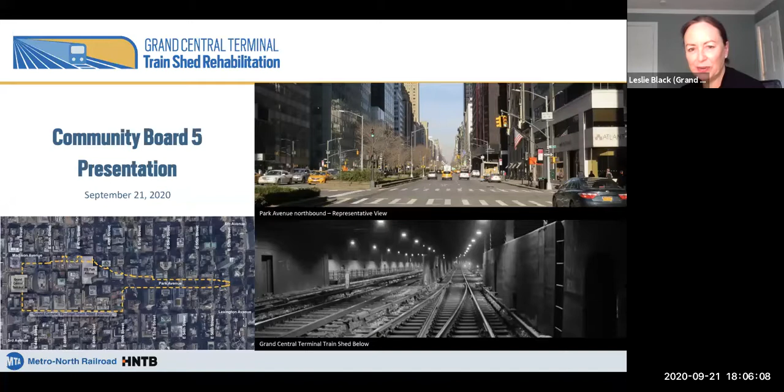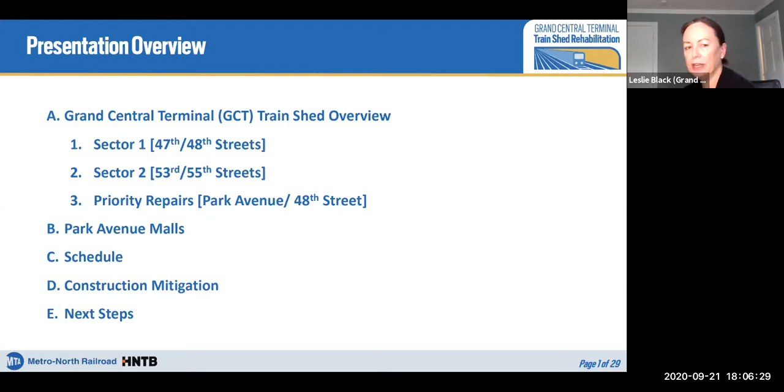Thank you. This is just a presentation overview. We will be covering the sectors that are currently underway, as well as priority repairs. We'll discuss Park Avenue malls, the overarching program schedule, construction mitigation, and next steps.

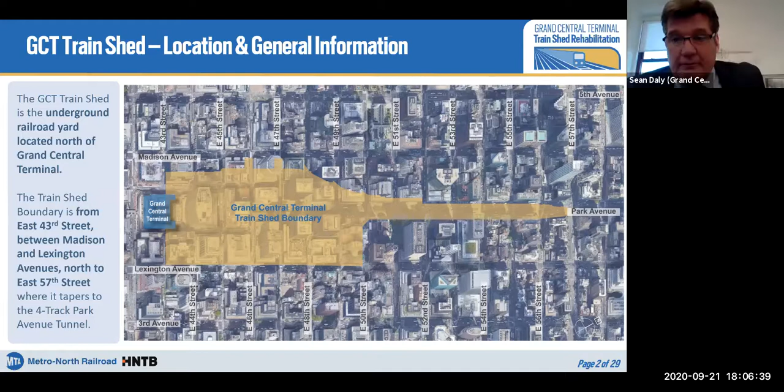I'm going to take you through the first couple of slides here to give you a sense of place of where we are, and then I'm going to hand it over to Sean to go into more detail on the project specifics.

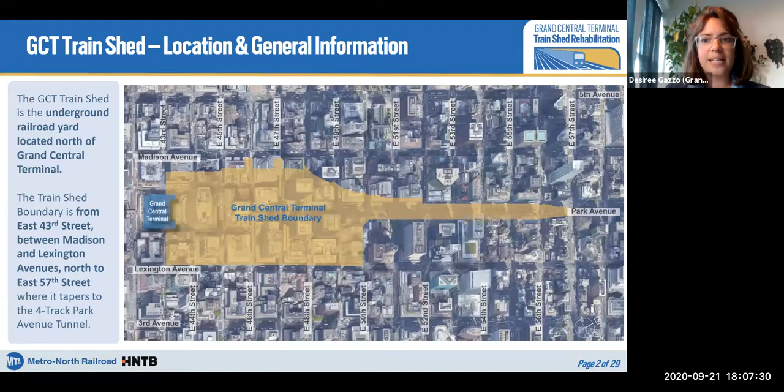As you can see here, the Grand Central Terminal train shed boundary is in yellow. The southernmost limits are Grand Central Terminal at 43rd Street. To the west, Madison Avenue; to the east, Lexington Avenue, and then it tapers down along Park Avenue to East 57th Street.

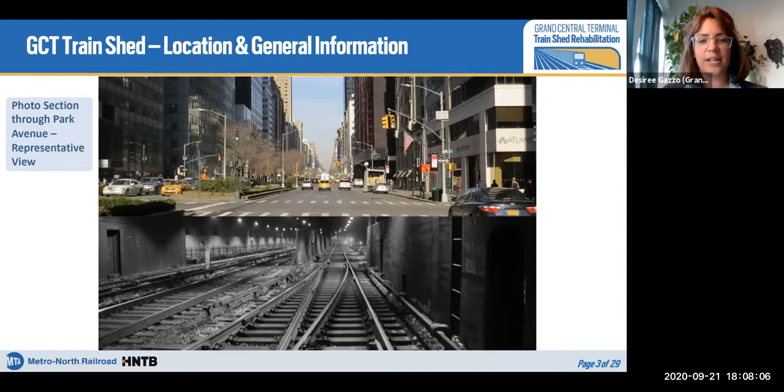Here's a section through Park Avenue. The train shed, which we just showed the yellow outline for, is the image below — if you're a commuter, you should be very used to this image. If you're not, then you know the picture above is more of what you're used to seeing: the streets, the roadways, the Park Avenue Mall, and the hustle and bustle of New York. Underground, there's this whole network of trains and tracks in the Metro North train shed.

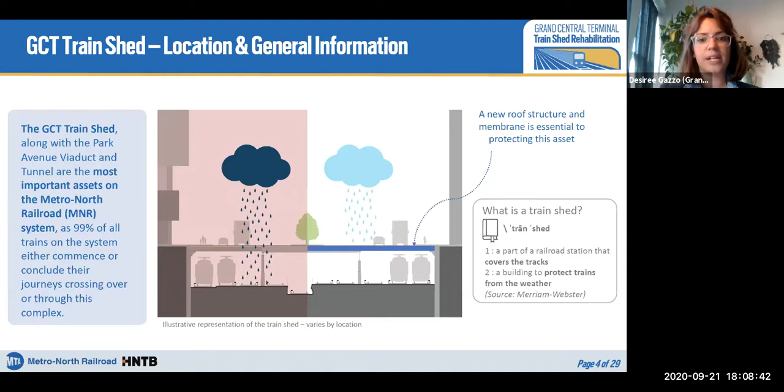Here's an illustration of where we are today, with the existing conditions on the left. Right now the roof structure and membrane are not in the best shape, allowing stormwater and other water to get down into the train shed below. The train shed is typically a building — in this case, a roof structure that protects the tracks and the trains. This train shed is one of Metro North's most important assets.

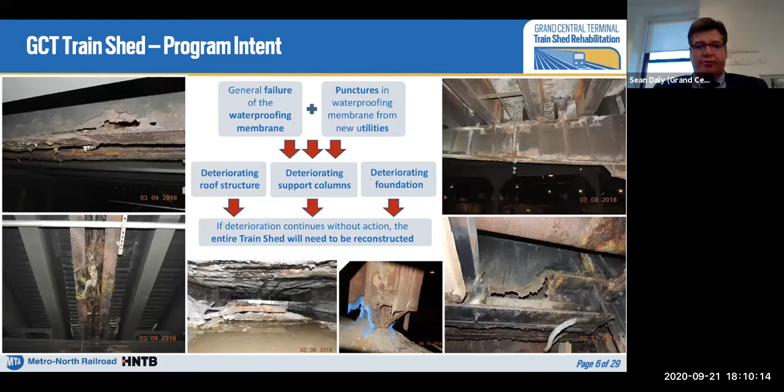As you can see here, our program intent addresses a general failure of the waterproofing membrane. We have not had any opportunity to replace a waterproofing membrane for over 100 years. You can see by some of these pictures just how severe some of the corrosion is. It's not only the failure of the waterproofing, but also punctures over time from bringing in new utilities, creating holes that, combined with water infiltration, have led to where we are now.

Again, just more up close, you can see how close the deterioration is to street level right here, and some more illustration of the severity of the corrosion.

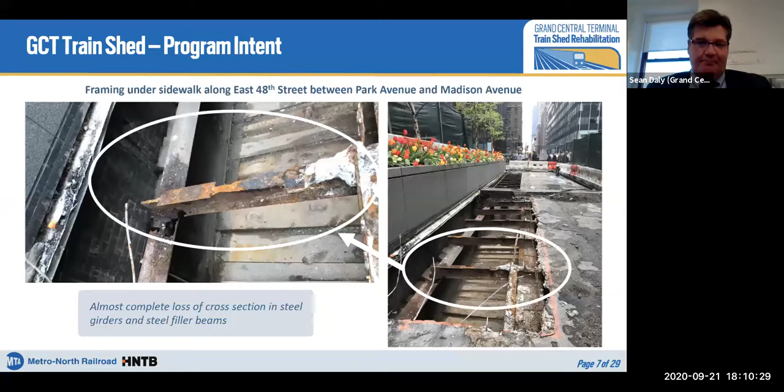Now you can see here from 1984 through 2012, there had been a total of 5 separate priority repair programs. The intent of the priority repair program is to identify the most critical areas in need of repair. Over the course of many years, we have implemented these programs. However, you can see clearly from this picture that we can no longer keep up with the rate of deterioration, and something more aggressive needed to be undertaken.

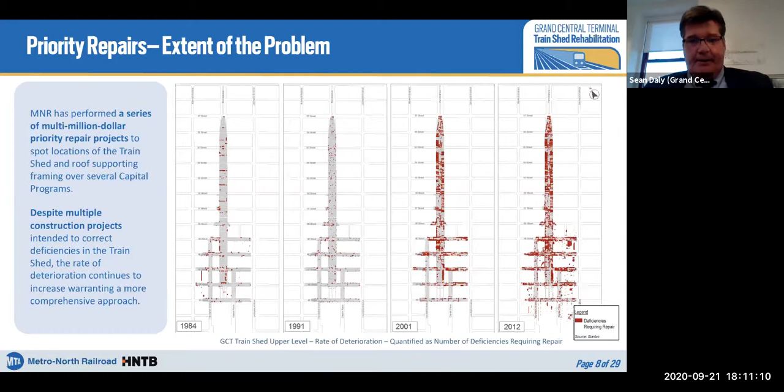Here you can see what the bigger picture proposal is. On this illustration, you can see where we have identified 2 sectors. To date, we have identified a total of 11 sectors that make up the entire train shed. We're going to be talking about the first 2 sectors this evening.

Also, you can see priority repair number 6 identified there. That is one of many areas that we are currently fixing under our current priority repair program. That's just the largest one, and you can actually see it now if you walk out on the street at 48th and Park Avenue, you can see our progress.

I want to talk a little bit about Sector 1 and the differences between 1 and 2. You can clearly see that Sector 1 only goes halfway across the train shed at this location, from the west side of Park Avenue and the west portion of 48th and 47th Street. The intent is to do this work in conjunction with the 270 Park Avenue redevelopment, which is currently underway.

Sector 2, which is from 53rd through 55th Street, the major difference here being that the train shed spans across the entire width of Park Avenue. So any betterments or upgrades that we are proposing at the Sector 2 location, we will be able to complete in one construction phase. Sector 1 we will be able to do half, basically from Madison over to the center line of Park Avenue, and then revisit the sector to the east when we are in that capital program.

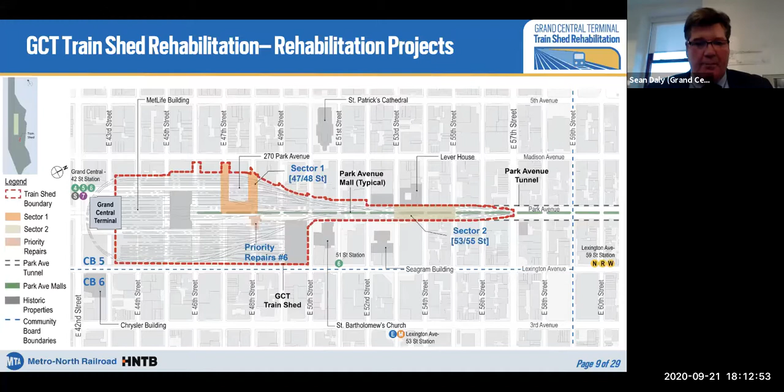Here's a bigger view. You can see the viaduct which surrounds the 270 Park Avenue redevelopment.

Again, the intent is to work with the schedule for the 270 Park Avenue redevelopment and try to maximize efficiency with the work that's going to be done underground.

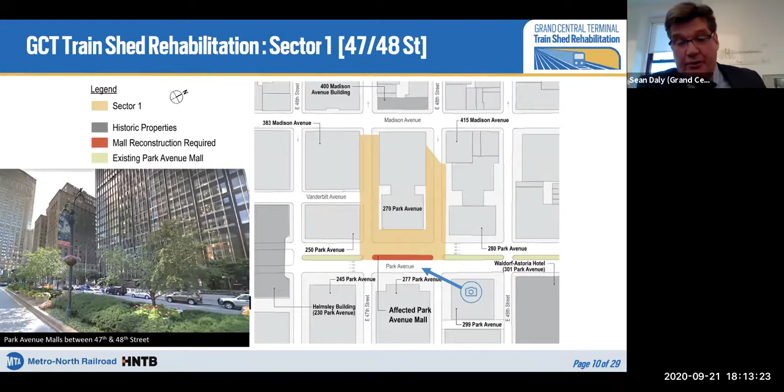Here you can see a 3D rendering to give the neighborhood a sense of just how close we are to the work. A significant difference here compared to, say, the 2nd Avenue subway: we do not have to do any major excavation, we do not have to do any building underpinning. Basically, we are replacing a bridge. So our intent is to get as much work done below grade before we impact the above-grade everyday life of the people affected by this work.

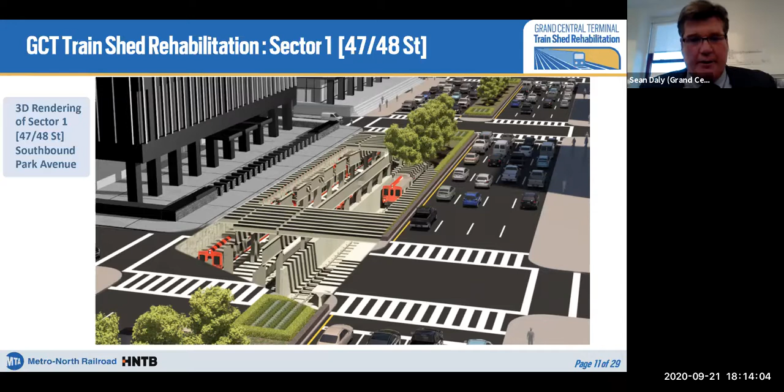Here you can see a typical section looking north at the Sector 1 location. You can see that we have 2 layers, the upper level and the lower level of the train shed, followed by the street above. You can clearly see that the viaduct roof, which you saw in the earlier photos, is in severe condition, and it is supporting not only the people but the cars, and it obviously needs to be maintained to allow for train operations to continue unimpeded.

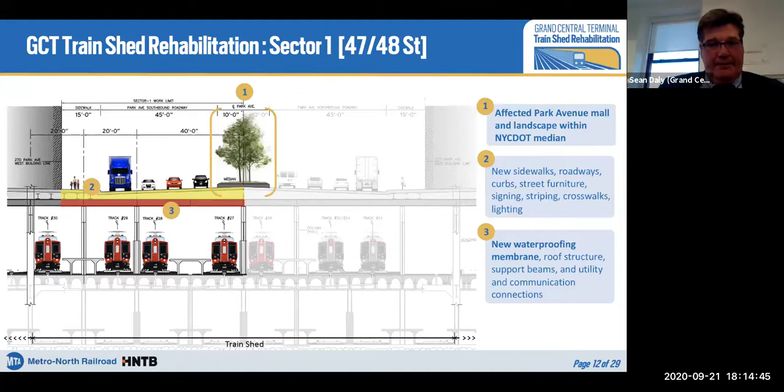Here's a quick look at Sector 2, which we discussed before, from 53rd through 55th Street. Again, just another look showing that all of the work being proposed here at Sector 2 will traverse the entire width of the train shed.

So whatever we propose, we'll be able to complete from one side to the other in that same construction phase.

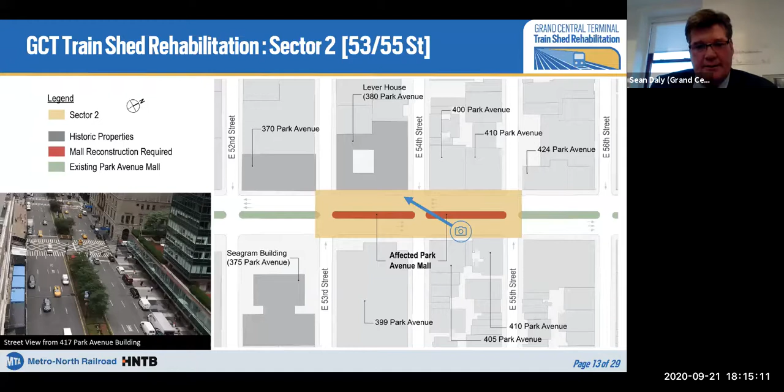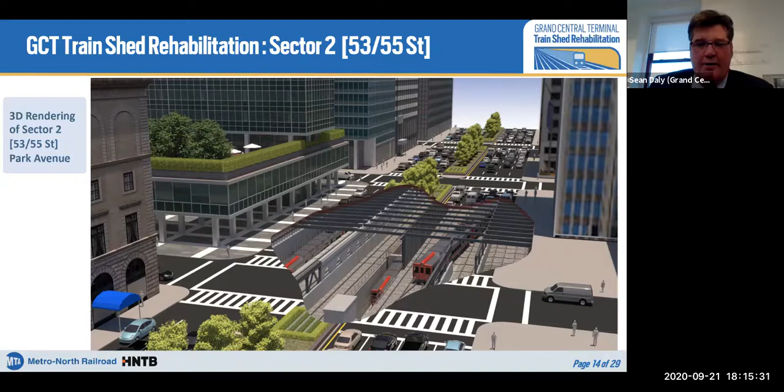Again, just a typical section through the Sector 2 location, going from one side of Park Avenue to the other. Some points worth noting: at that center span, the individual stringers are some 55.5 feet long—rather large pieces of steel that we need to deal with during construction. Part of this will involve rediverting traffic flows to allow us access to areas and replace steel from column line to column line.

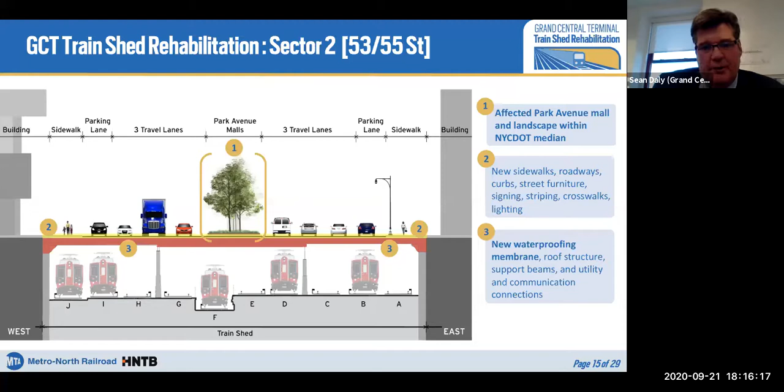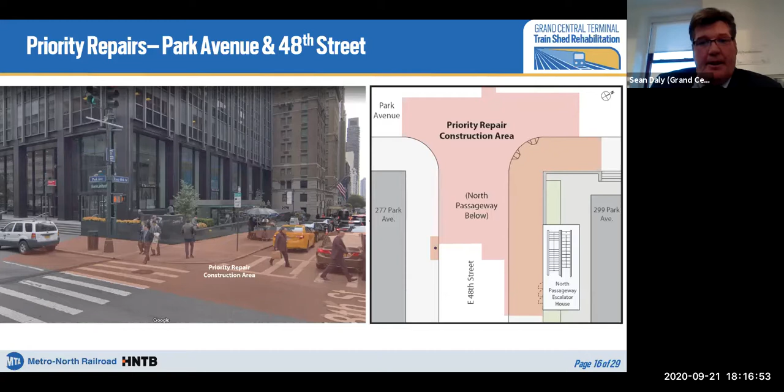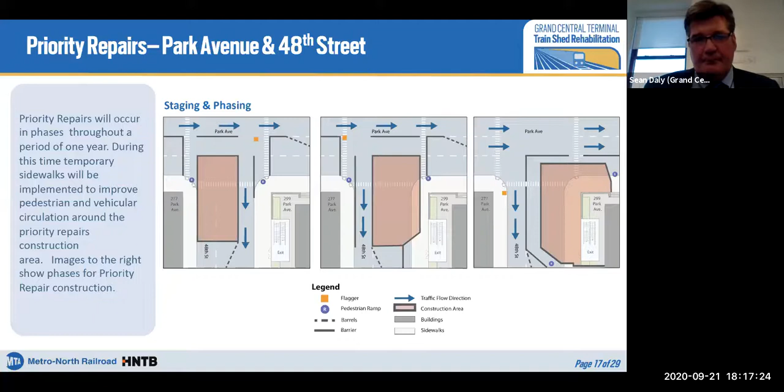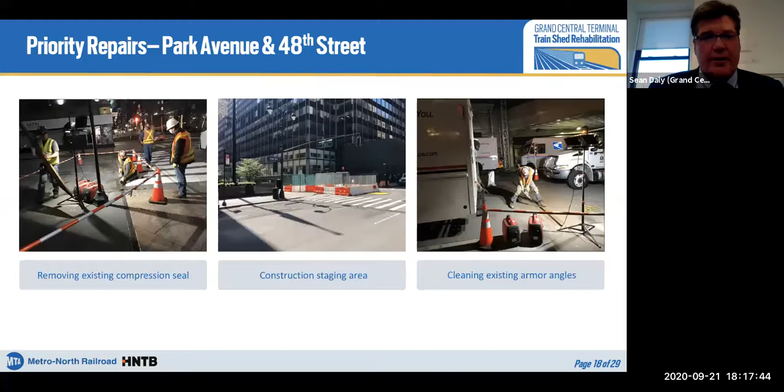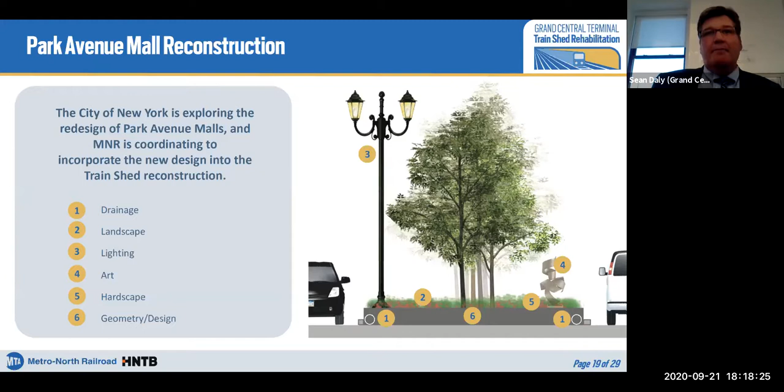Okay, just a quick look at what we're looking at with the malls. We understand that the malls are going to be dismantled to allow for us to do our reconstruction of the viaduct roof. We are now working closely with New York City DOT, as well as the Mayor's Office Capital Project Development Team, listening closely and working with them to figure out what ultimately they are going to decide to put in that space. Ideally, we will be able to allow the designer of our viaduct to incorporate all those final revisions that are being proposed, or considered, I should say.

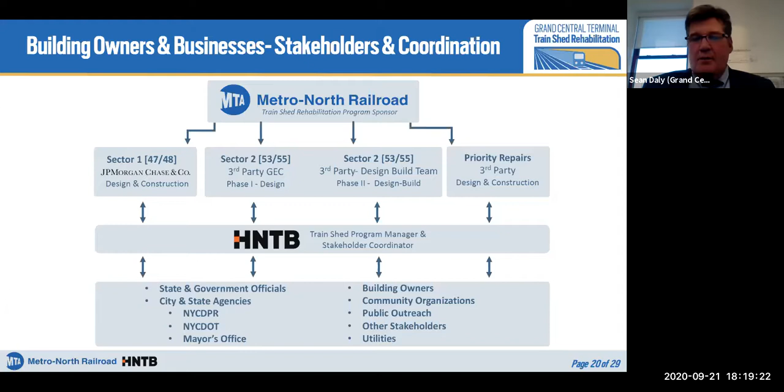For Sector 2, the first phase is design. The second phase will be a design-build team, which won't take place until the next capital program. Then we have the priority repairs, which are presently ongoing. HNTB is the go-between for all of those entities and all of the third-party stakeholders.

As you can see, all of the state and local governments and city agencies—we have dealt with all of them to date. This is our first meeting with Community Board 5. We have a meeting with Community Board 6 on September 29th, where we will give this presentation as well. We're working closely with all of the buildings affected by this work, and we'll continue to do so throughout the life of the program.

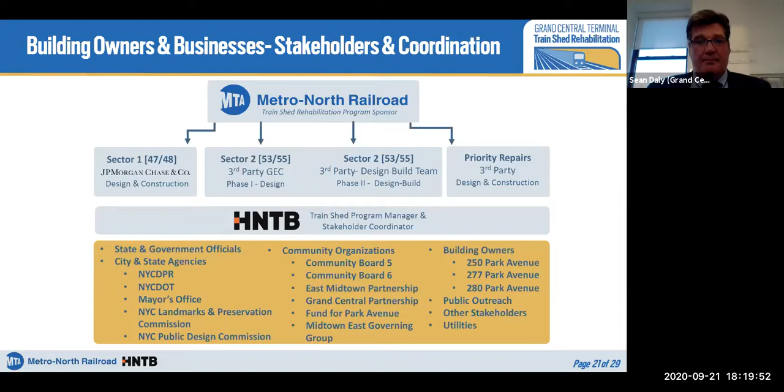Sector 1, we are finishing up the design now. We have a phase A and a phase B. Phase A design is intended to do the sub-grade work, mainly the columns and girder restoration and reinforcement.

I'm breaking out the construction of Sector 1. Phase A construction for Sector 1 is below grade, the columns and girders. That will take place from 2021 through 2022.

The intent here is to do all of the heavy lifting on the subgrade work so that in 2022, when we actually remove the deck, the sidewalks, and the stringers, we have all our preparation work below already performed, with minimal impact on the street above.

That's the intent there. Sector 2, we are presently in the phase 1 design, which will bring us to 60% design. Construction will not take place until the next capital program, sometime in 2025. The outreach activities, you can see all the elected officials we are dealing with.

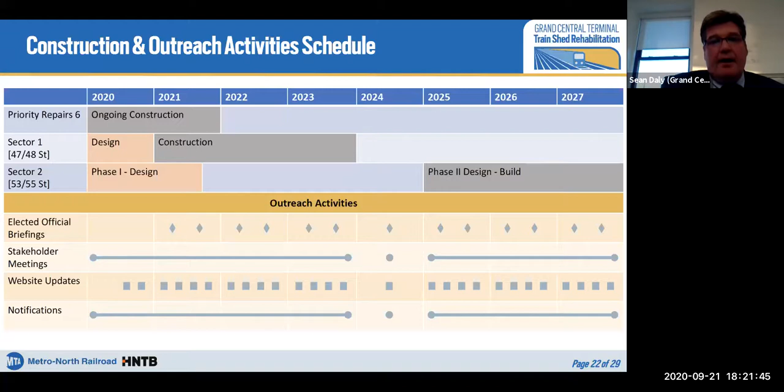We have been on a regular basis in continual stakeholder meetings. We have recently developed a website, and we look forward to having more interaction with the public through that. We will have notifications throughout the life of the program. I'll pass this off to Leslie now.

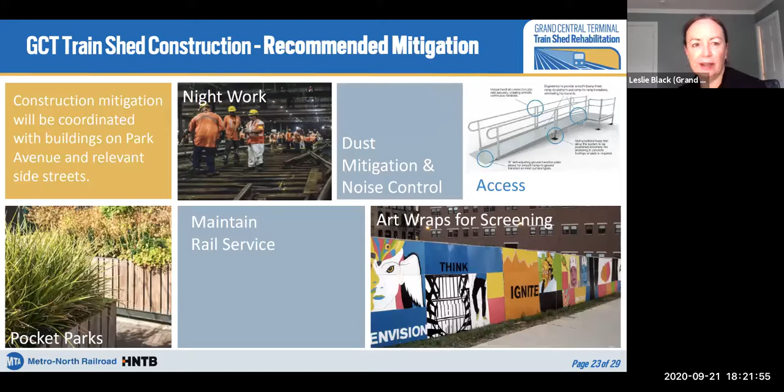Thanks, Sean. We'd like to discuss further the outreach elements and the construction recommended mitigation elements. With respect to community outreach and coordination, as you saw from the schedule, this will be conducted throughout the program. We'll be providing program updates through fact sheets and newsletters.

We have a project email contact developed, which we'll share at the end of this presentation. As Sean noted, we are developing a website, still in draft development, which will launch shortly. Due to COVID-19, our in-person events are on hold for now, but we share information electronically and conduct meetings virtually, following through with these elements as best we can.

With respect to construction coordination, we wanted to provide an update because you live and work here, with respect to the different accessibility pieces of information that help you get around as construction goes on.

With respect to access, sidewalks will still be available and buildings will remain accessible. We will install temporary sidewalks and overhead protection around construction, and these elements will be dynamic and shift as work progresses. Delivery access to buildings is very important too, and that will be maintained whenever possible.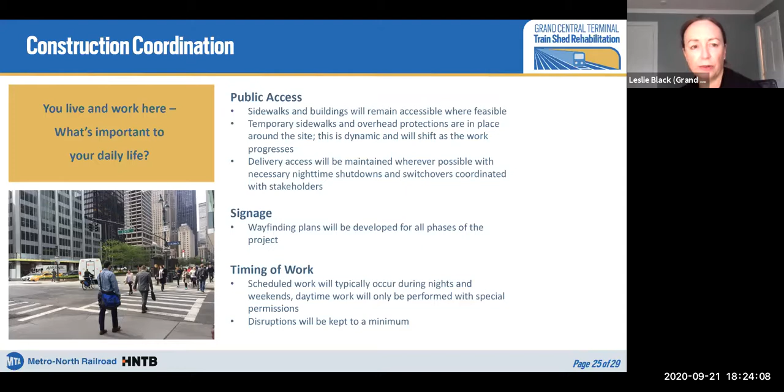With respect to dust mitigation, noise mitigation, construction equipment, and our site safety plans, we are working in compliance with New York City codes, incorporating required safety rules and COVID guidelines. For all of those elements, we're in compliance.

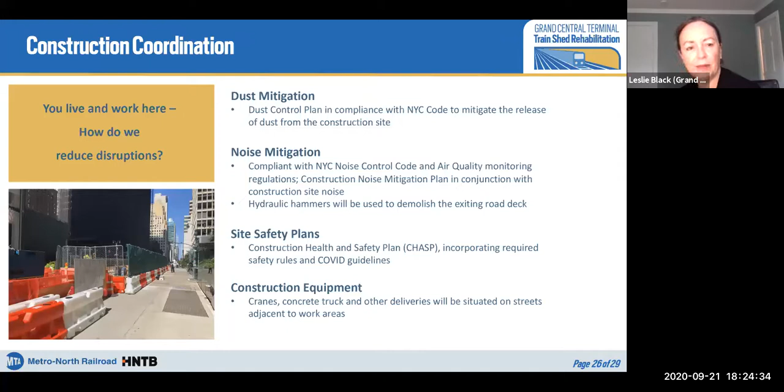We are coordinating, as Sean indicated, with both our utility and non-utility stakeholders, and this coordination will be ongoing. We're currently working with agencies to ensure infrastructure advancements are in line with neighborhood rezoning.

With respect to building owner coordination, we are meeting with building owners on a regular basis to provide updates. I believe Sean walked through many of the elements with respect to new pilings and underpinnings, sidewalk advancements, and business access.

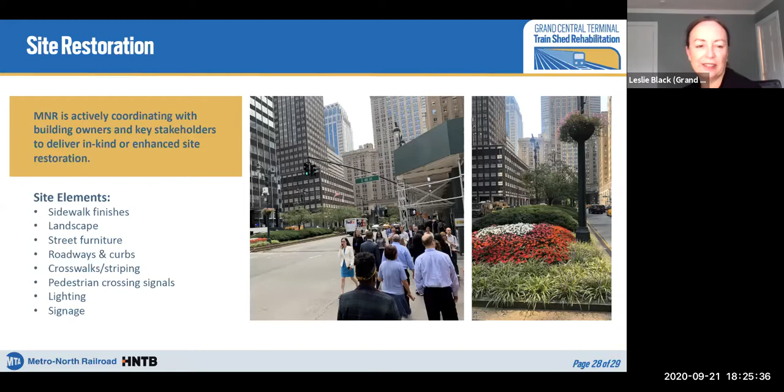And site restoration. Once we are done, we're turning things back to what they were, with respect to in-kind or enhanced site restoration. All elements will be taken into consideration, including sidewalk finishes, landscape, street furniture, roadways and curbs, crosswalks and striping, pedestrian crossing signals, and of course lighting and signage.